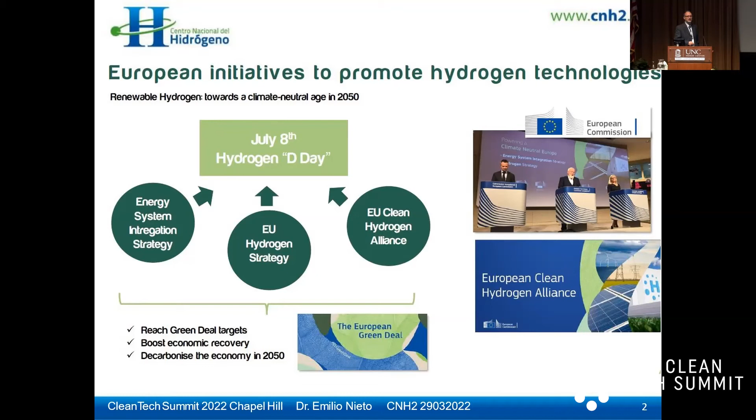We're not talking only about research projects, but also about how to help with investment, how to help with regulation, which is a critical point, and also how to boost the market situation and improve the possibilities for people—not only companies, but also people working in universities and research centers—working together to comply with the goals already defined.

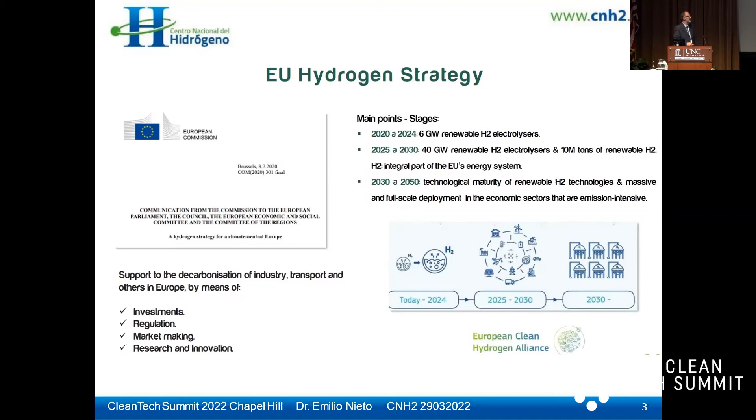And this is the brief discussion: the Commission wants to have close to 25% of hydrogen covering the demand for energy. They have a huge amount of money to put in, and we will see, because of the problem with the Russian war, the Commission is starting to think how to boost and speed up this process, and maybe the final decision next year is to put a bit more money and give more chance to deploy the hydrogen economy more quickly.

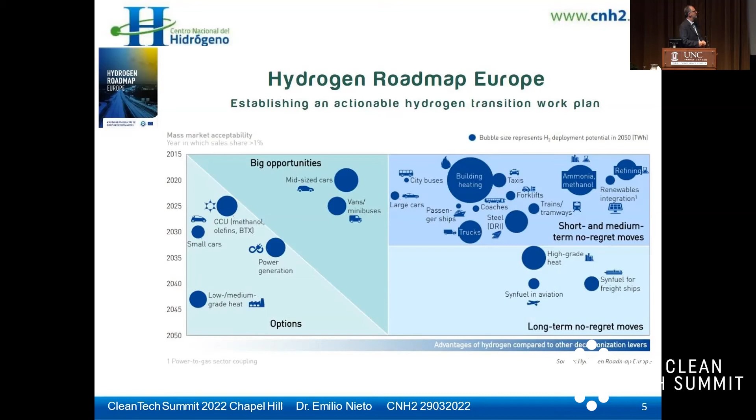You can see more or less the NOx reduction, CO2 reduction, and a lot of different jobs to be created. This diagram shows that the proposition is to play across all the goals—not only heavy duty, not only range, not only trucks, but also a lot of different possibilities. You can see here they are proposing different possibilities to boost short, medium, and long-term opportunities for creating and deploying all these things.

We have a lot of different possibilities for renewables, and a lot of different industries already consuming a large amount of tons of hydrogen today. This is a huge potential to profit and collaborate all together, and try to produce not only hydrogen for our own consumption in Spain, but also a lot of different hydrogen in order to sell outside Europe.

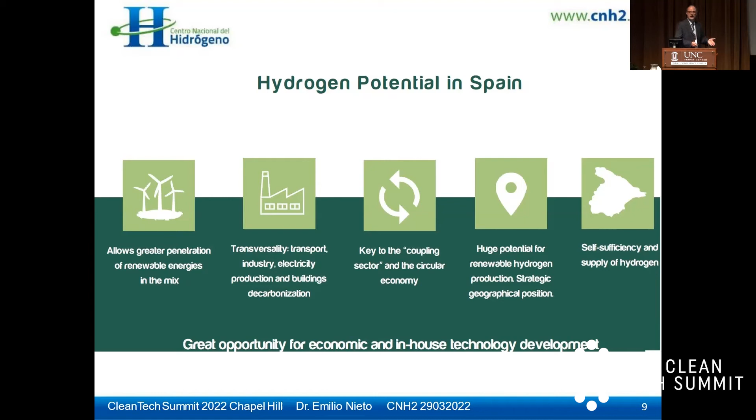There are a lot of different sustainable goals, and all this hydrogen momentum we are having in Spain, they concentrate on covering all the whole goals. You can see Action 9 and Action 17 based on research and development, and also how it's possible to boost renewable energy. That is the base of the strategy here in Spain in order to continue moving forward.

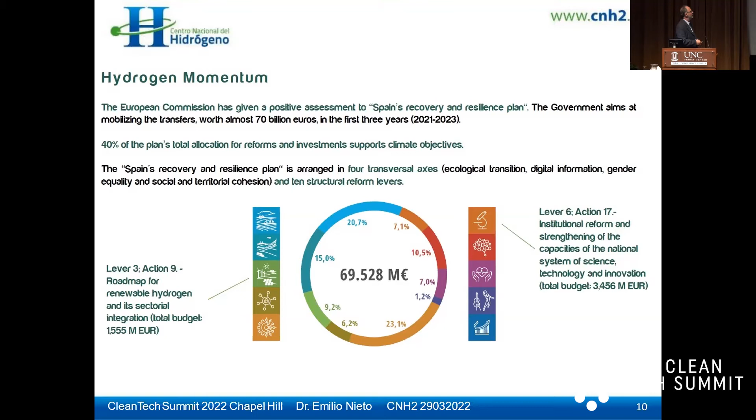But the hydrogen strategy in Spain, where is it concentrated? They are concentrating on green hydrogen, renewable hydrogen, using this renewable hydrogen as an energy vector. At the final part of the presentation, I will try to give you a lot of different examples about the different hubs and huge projects they are proposing.

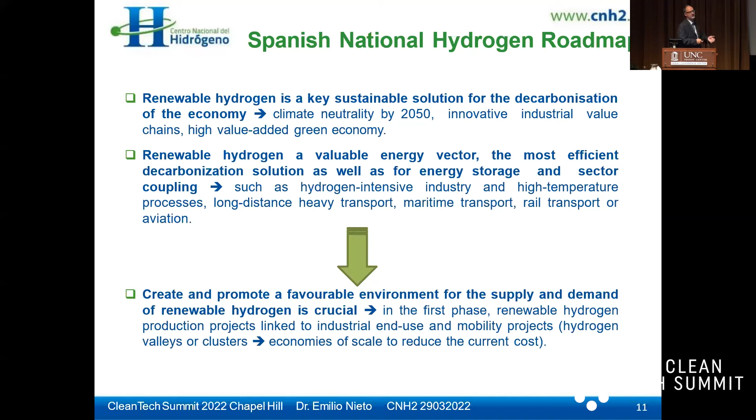But the main goal is to try to organize all together, to work in order to not lose opportunities, making isolated projects or proposals, and try to put it all together in order to present a real hub. It's not only about concentrating the production of hydrogen, but also trying to increase the demand and the off-takers of this hydrogen.

They are covering all the different applications of hydrogen. They are not concentrated only on applications that use hydrogen as a raw material in industry, but also on using the different possibilities that hydrogen offers where electrification is technically not feasible or very costly.

They are also covering the solutions hydrogen can offer on an island, in an isolated area, where you can disconnect completely from the network and continue working together in order to move forward.

And also the standards - this is quite a critical issue, not only in Spain but in all countries, in order to work all together to define a common rule and continue to create a standard and a regulation specifically for hydrogen.

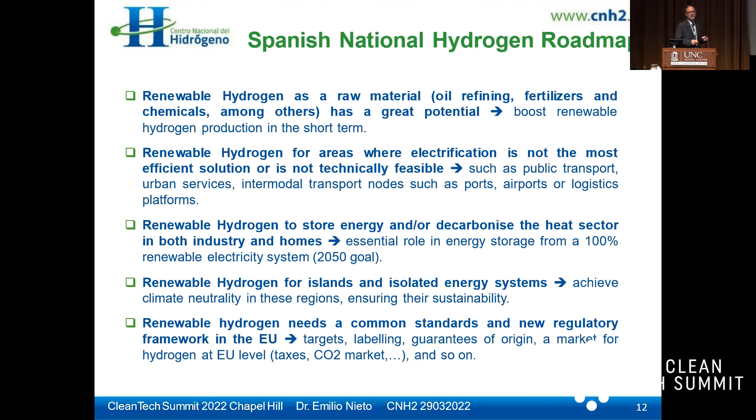There are 60 measures. These 60 measures are divided across different years. In the next slide, I will try to show you. The main goal is to try to present the whole value chain of hydrogen.

And the wide participation - I mean, this strategy was not published by one ministry, but by 4 ministries collaborating. For me, this is the first example in Spain of doing that. Most of the time they are isolated and not working together, and this is quite a good example that if you collaborate, it should be quite good in order to move forward.

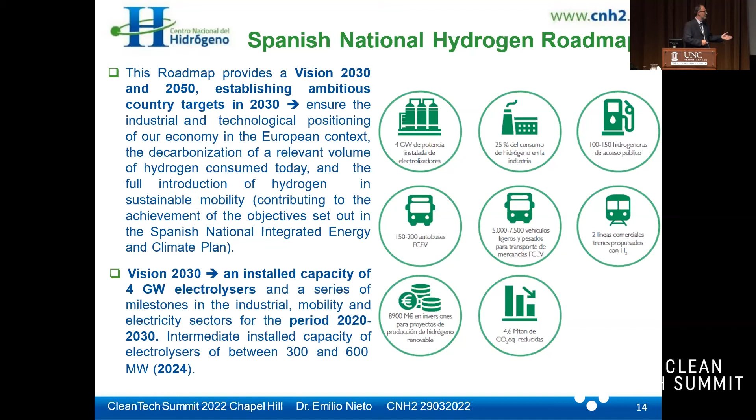We have this PERTE. The PERTE is the project for renewable energy, renewable hydrogen and storage. And this is the way that the ministry will spend the money.

You have to apply with this kind of funding possibilities, concentrate in these three main businesses, and the goal is to build on the strength we have in Spain regarding renewables capability, industry, and the technology and manufacturing we need to develop all together.

If we are tracking and checking individually, what's happening with the technology? We have a lot of different capabilities, but the problem is we don't have any company working on fuel cells or producing electrolyzers. So the main part of the money should go toward creating that situation in Spain, not buying the stacks outside Spain, but trying to make a Spanish stack and integrate it all together.

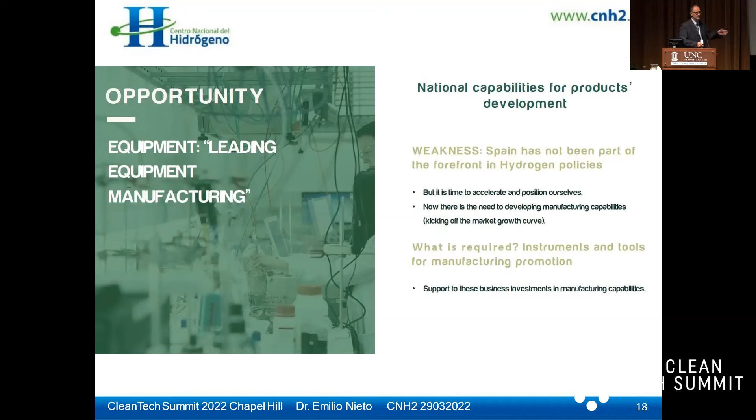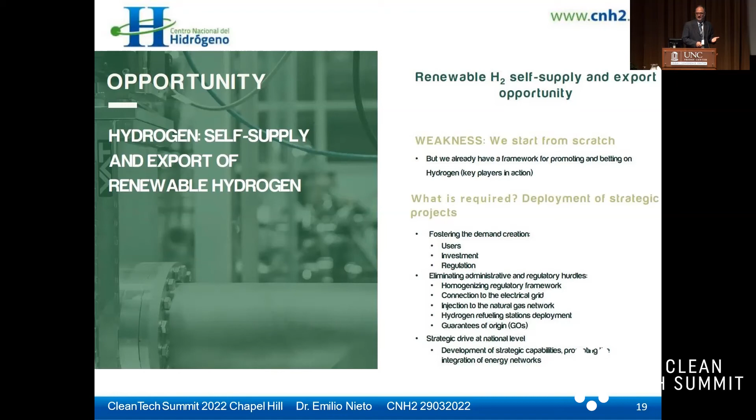Talking about manufacturing, the same applies. We have a lot of different capabilities and companies in Spain with a lot of experience in manufacturing, but they have no experience at all in the hydrogen business. So this kind of money needs to push those companies to apply and move forward, and also toward self-sufficiency. We've discussed over the last two days in different sessions how it's possible for us to start moving, but you can see we are starting from zero. This is the problem in order to move forward.

We have a lot of different bodies. The main body is the Spanish Association of Hydrogen, and we are now working on an industrial sectorial agenda, in Spanish. This is the first time the needs of the industry are considered, and how it's possible to cover those needs with different research projects and try to give a solution. This is a preliminary result, we are in the middle of the analysis.

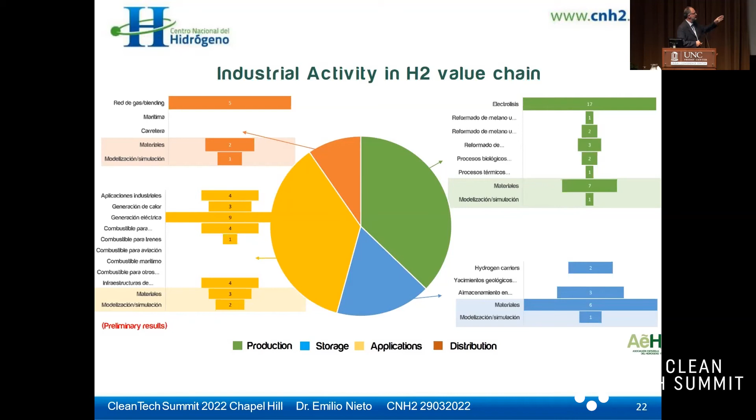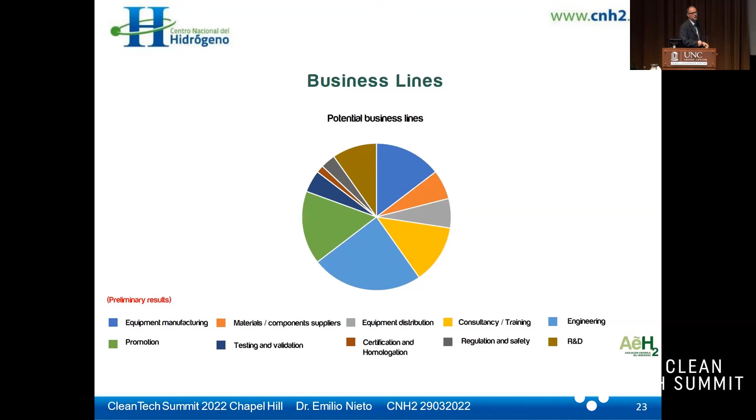If we look at the industry activity in Spain across the hydrogen value chain, most of it is concentrated in production and applications, with some part in storage and very little in distribution. Looking at business lines, we cover more or less all parts of the value chain, with a huge part being equipment manufacturing, also project promotion, and some part from research and development, as shown at the beginning of the presentation. These are the main distribution areas, the main possibilities for growth.

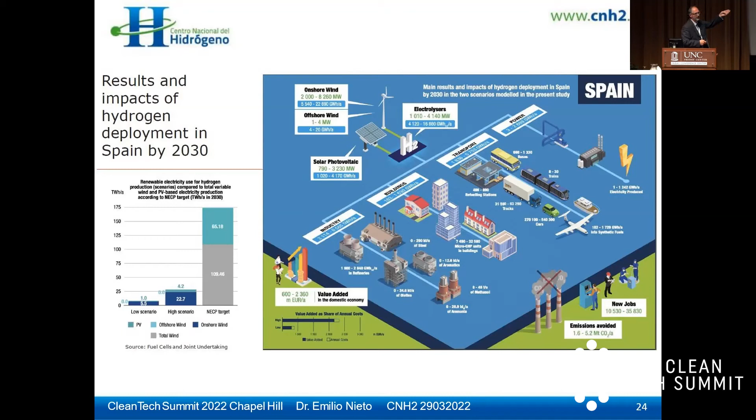This is the picture: having this value chain, having these hubs or clusters of hydrogen, with a lot of different companies working together to integrate renewables, whatever form that takes. In Spain we have a lot of photovoltaic, not too much wind, but we are pushing to increase wind capacity in order to feed the electrolyzer. Once the industry produces the hydrogen, it can cover different industrial lines, buildings, and also be used for energy production.

Some words about our center, the National Hydrogen Center. The National Hydrogen Center started in 2007, so this year we will have 15 years. For me it's a success, because we started from scratch with no experience at all in hydrogen. When we started in 2007, people looked at us like we were coming from the moon, because we were talking about hydrogen and nobody knew anything about it.

It took 2 or 3 different opportunities, and now it seems that this is the time of hydrogen. These 15 years of working to increase our knowledge and capabilities allow us now to start giving added value and collaborate with different industries on all the different projects we will show you later.

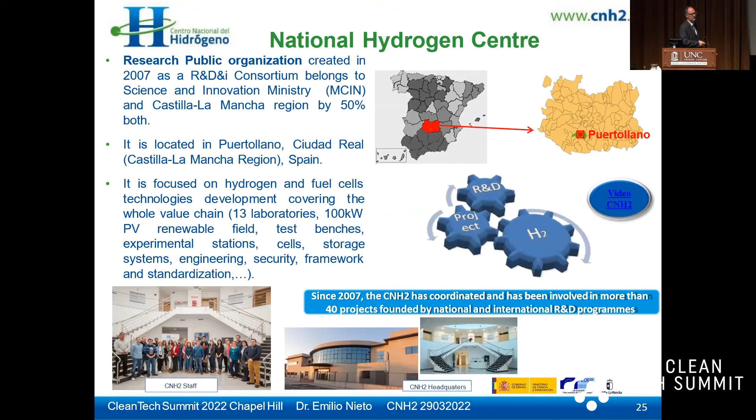We have 13 labs, and we cover the whole value chain. This means we have different labs for production of hydrogen, of course concentrated on green hydrogen, but we also have different processes including biohydrogen and photoelectrocatalysis, which is a new process being tested by different companies in Spain.

Once we have the hydrogen, we have different labs working on how to store it. We are working with different approaches, but the main process is storing it as a gas under pressure.

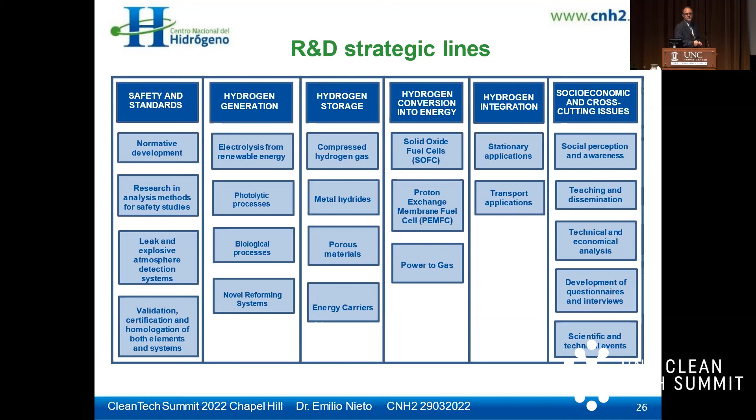We have different plans to continue working with different systems to store the hydrogen, and how to develop the different conversion using the fuel cell, not only for low and medium temperature, but also high temperature with solid oxide fuel cells. Then to apply it in different applications, not only for mobility, who pay more per kilo of hydrogen, but also for stationary applications. Two important corners are security and safety, and also the cross-cutting issues. As an administration body, we have to inform society in order to move forward.

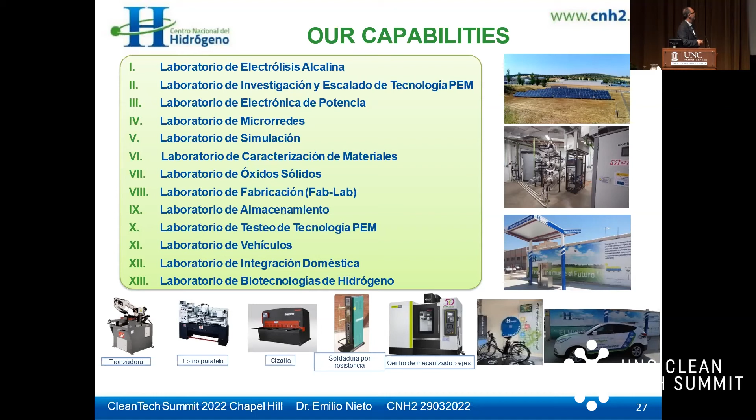Now we are building the second one with two different pressures and portable, so it's possible to use this in a truck to move around and make the validation, whatever the project is. We also have different laboratories and mechanisms to make different pieces or parts of the value chain, giving us very good information about that.

Some projects: in the last 3 years we had 2 regional projects. One was concentrated on using biomass and waste - in that area in Spain, waste from the forest and from agriculture. We process different mechanical treatments in order to increase efficiency and achieve syngas.

Another regional project was concentrated simultaneously on how it's possible to improve the solid oxide fuel cell. Now we are working on integrating both systems and making a pilot plant in order to use this to produce heat, cooling, and electricity.

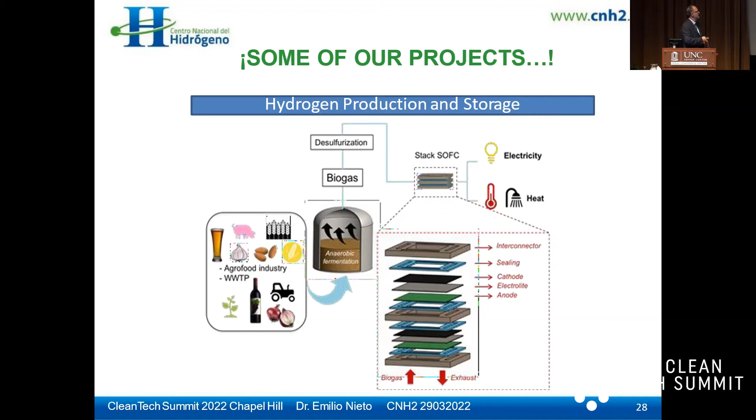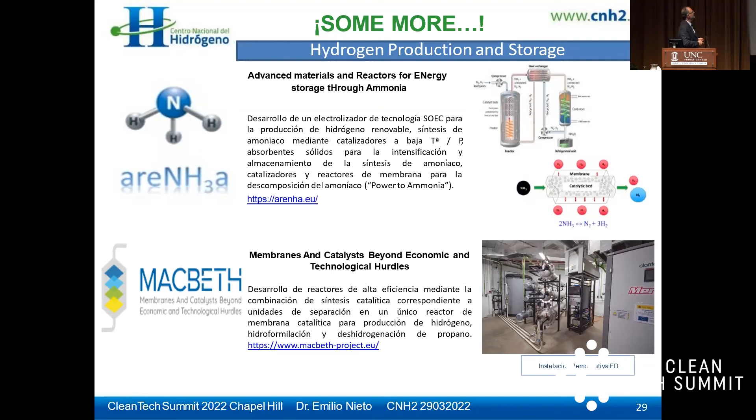Another project, a European project we're working on, is with ammonia. One of them, MACBETH, is about how it's possible to improve the catalyzer. This catalyzer will be applied in the ARENHA project, where the whole process will be integrated, and you will be producing green ammonia, with the possibility to test the green ammonia's behavior against all the different possibilities for storing hydrogen.

One important project from the Commission is H2Ports. H2Ports is the use of hydrogen not as a fuel for ships, but as a decarbonized solution for the logistics of the port. We are working here to create a reach stacker and a yard tractor that use hydrogen for moving. You can see the blue area - this is the Valencia port on the Mediterranean coast of Spain.

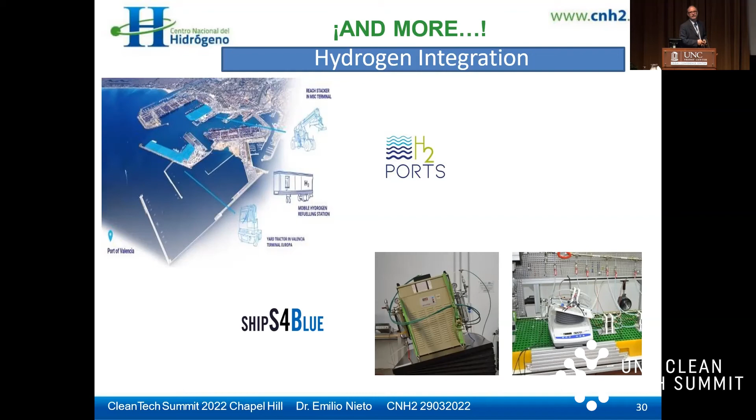In the smaller green area, we are producing the hydrogen, and we have one truck with the final storage and different tools for feeding. These move to the other big area where there are different vehicles for the loading and unloading of containers within the port.

We have another project - we are creating a car. This car should compete next year in Sweden. This is a competition with different categories, and it will compete in the hydrogen category, and we will see what happens.

We have another project together, about how to use hydrogen in a domestic area to have a micro CHP working in the house, and also to use the surplus energy you are producing to produce a small amount of hydrogen. This small amount of hydrogen goes to a small hydrogen refueling station, maximum 1 kilo of hydrogen. You use this 1 kilo for your daily transportation to save money, because most people, when driving every day, don't drive too many kilometers. So with this 1 kilo of hydrogen, it's enough for you to move and come back, and it's not costly.

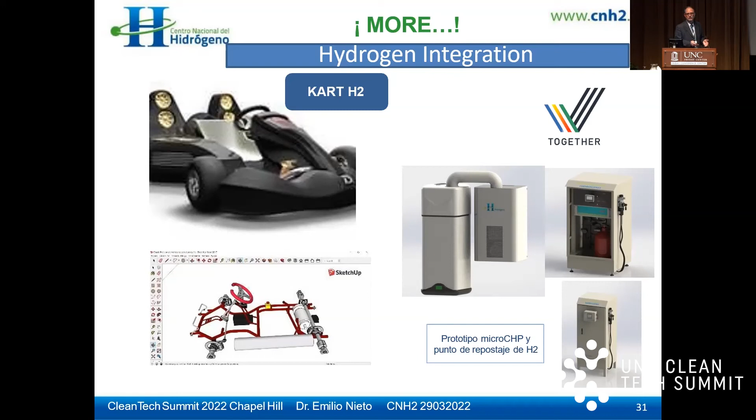And of course, when you want to travel on weekends, you need to go to a hydrogen refueling station, not in Spain because we don't have it yet, but in the near future it will be possible. I will show you a free application you can download from Google Play called Hydro Travel, so you can have on your mobile how your travel will be if hydrogen is used as a fuel cell.

This was developed there in the Institute, and the idea is to integrate all the maps in the future in Spain in order to have all the hydrogen refueling stations available at that time.

The other two projects: one is mining electromobility, an international project collaborating with Chile. You know that when you want to open an underground mine, ventilation is 80% of the CapEx. By using hydrogen in these vehicles, you can reduce close to 90% of this investment, because you don't need such huge ventilation equipment, since only vapor is exhausted from these vehicles. This should be very good for keeping the underground mining environment clean.

Another important project uses smart grids. This is the Interreg Sudoe, a project from the southwest of Europe covering France, Spain, and Portugal. We are creating a smart grid with different sources of energy integrated into the same system, applied to a building with 24 hours, 7 days a week energy needs, trying to achieve a zero emissions goal.

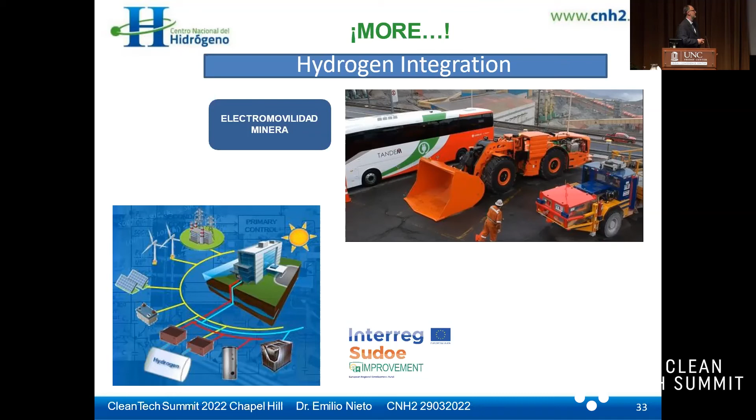This is a very important project. We will have two demonstrations: one at the end of this year in a hospital in the Mediterranean area, and the other at a data center in a university in Lisbon. With these two, it's possible to show that you can disconnect from the network, start working, and not suffer a lack of resources.

And of course there are more projects about how it's possible to inform what hydrogen is, and which kinds of things with hydrogen are possible to move forward.

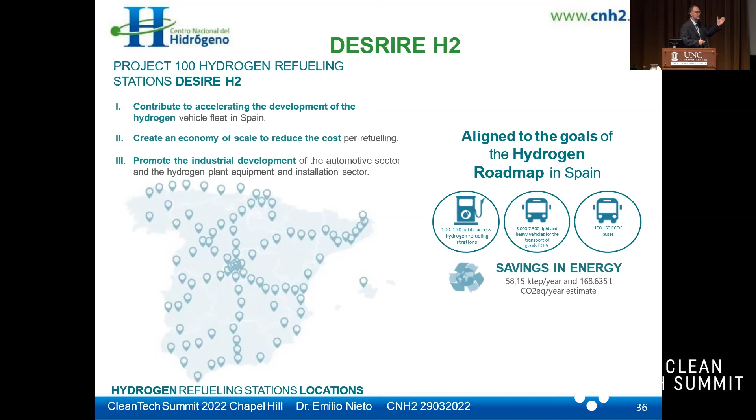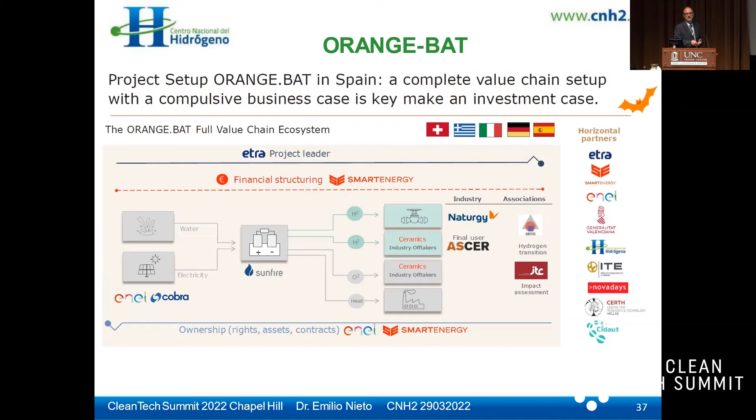Another one is Orange Bat. This is an IPCEI project, an important project in Europe, covering the whole value chain and focused on the ceramic industry. This is one of the applications, like steel or construction, but ceramics is also a high consumer of gas and energy, producing a lot of CO2 emissions.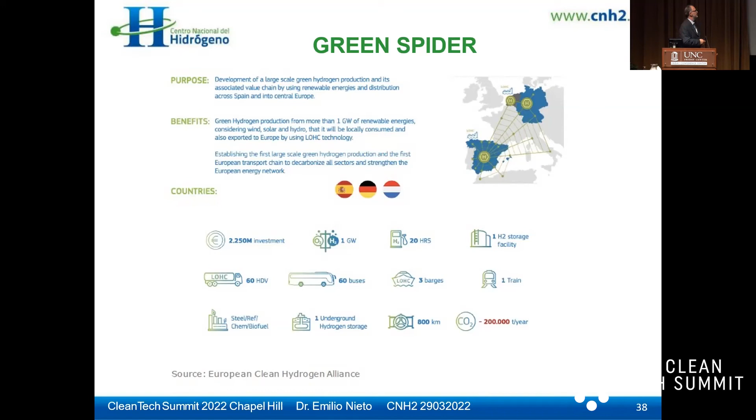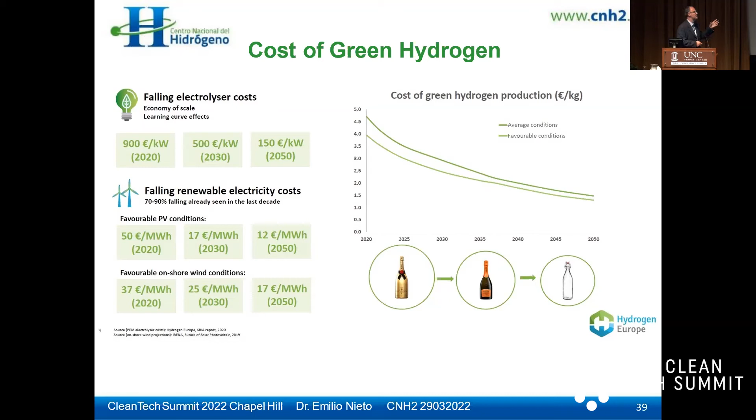The cost of hydrogen - these are the last figures from the Hydrogen Europe publication. The main goal is to reduce costs as quickly as possible and try not to be a luxury product, but to be a commodity. Of course, this isn't always easy, and we need to work on producing this hydrogen. It's not just a question of producing a lot of different hydrogen, but I have to spend a lot of money to store that production. I need to force the off-takers and force the demand. If demand is also available, the cost will be reduced more quickly.

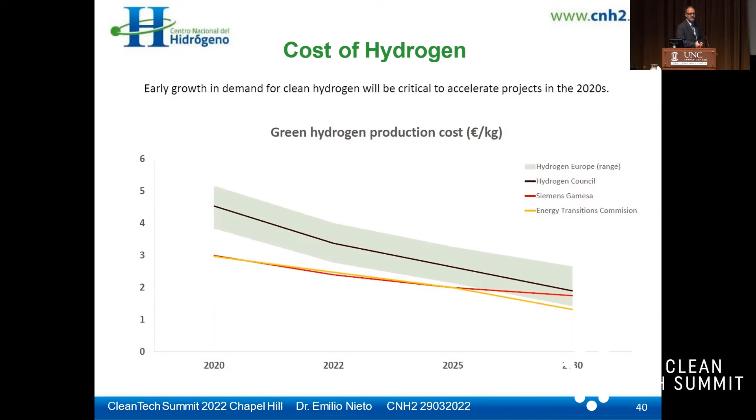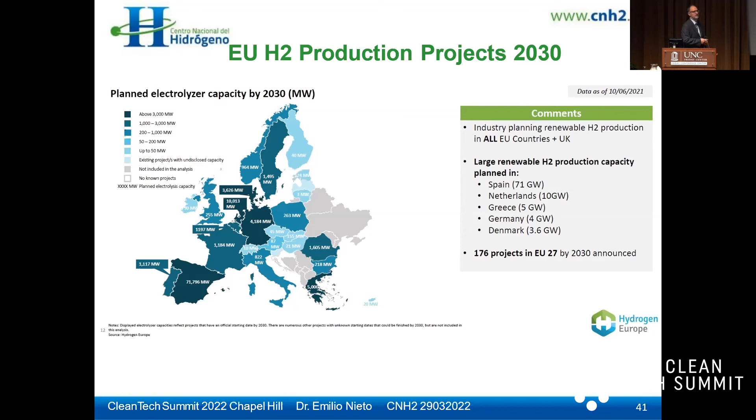The Commission was sharing this kind of information - there were more than 170 projects proposed. It will also try to cope with these solutions to give a possibility to remove the barriers, try to reduce the cost mainly, and create all the facilities and ground to propose this kind of projects in a harmonized way. I tried also to show the transition from gray to green hydrogen, which is the main goal in order to reduce CO2 emissions at the end.

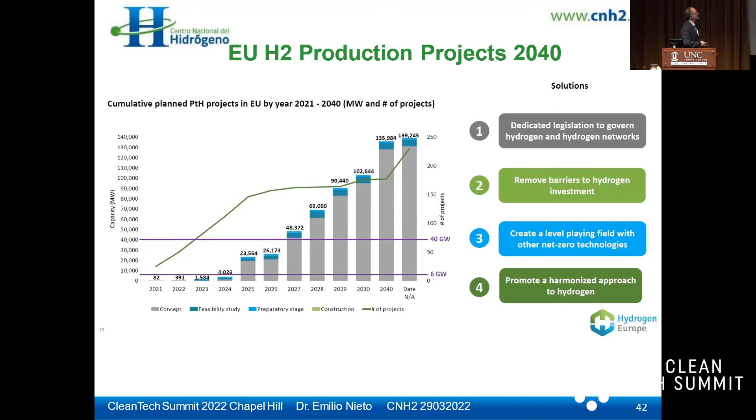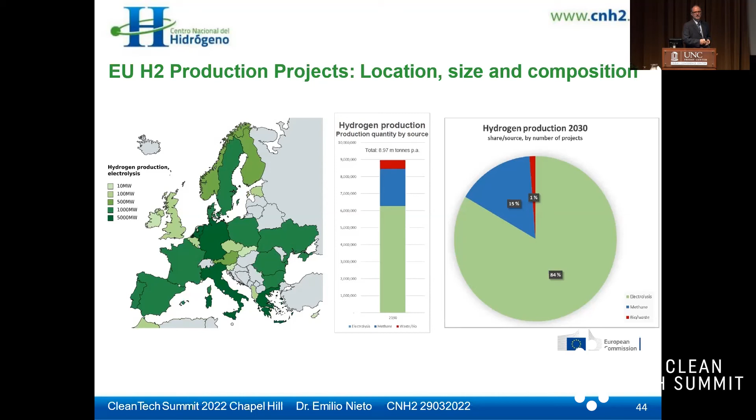If we talk about the production process, most of them are electrolysis, and some part is also methanation. Methanation uses the emission of CO2, blending it with syngas, treating the waste, and trying to make methane - green methane - in order to use as a fuel, or to integrate this kind of methane into the gas grid.

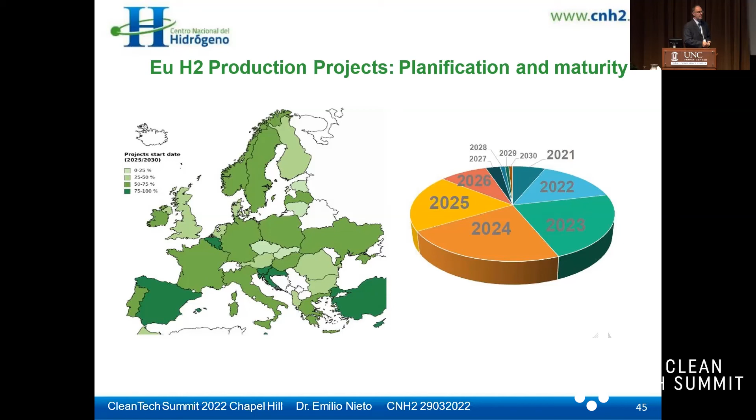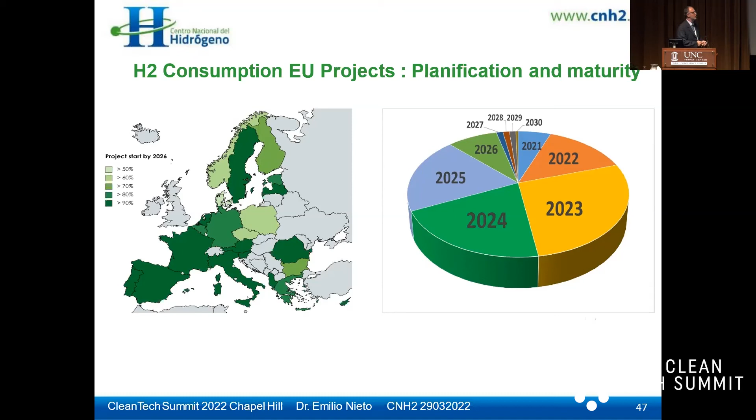The main goal you can see in the production is the same as in the consumption of the hydrogen projects proposed. It's more concentrated in 2024 and 2025 in order to have those projects already in work. If we try to make an analysis about the different applications for where this hydrogen will be used.

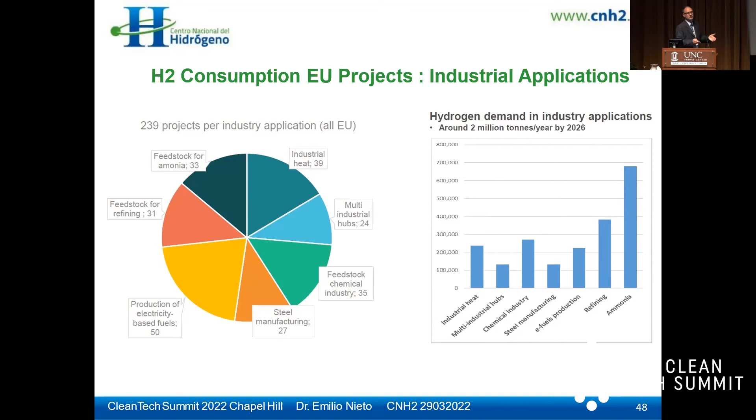It will be ammonia, refining, and the chemical industry as we are already using. We are not thinking about creating new applications. First, the main goal is to try to replace the gray hydrogen, and this amount in Spain we consume is about 500,000 tons of hydrogen. The main one is refinery, the second is fertilizers, and the third is a mixture of different industrial applications as raw material. The main goal is to try to replace this gray for green, instead of thinking how it's possible to create new applications for using this gray hydrogen.

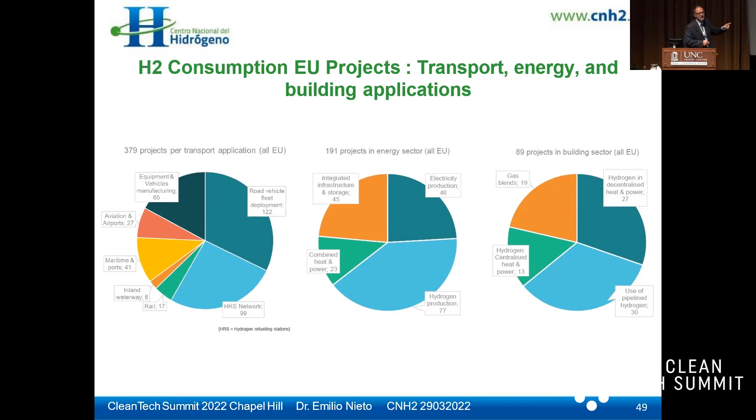In order to see how those projects will be presented, the amount of projects will cover the transport, energy, and building applications. You can see here the different transport applications - of course, the main part is to create a fleet. If we talk about energy, the main part is the production of hydrogen and also the production of electricity. And if we talk about building applications, you can see it's more or less equal across the 4 different distributions of applications.

This is the last one. I don't want us to be too far from the point - I would like to say that we are talking about hydrogen, but hydrogen is not the unique solution. At the end, we need a blending of technologies, a mix and hybridization of different technologies. Of course, hydrogen will be the best in some parts, but in other parts there will be different solutions, like batteries, for example.

This is only to show you that the people working on batteries continue working and trying to improve the different materials and efficiency, and of course they are working to reduce the cost in the future. So we will achieve 2050 with a lower cost.

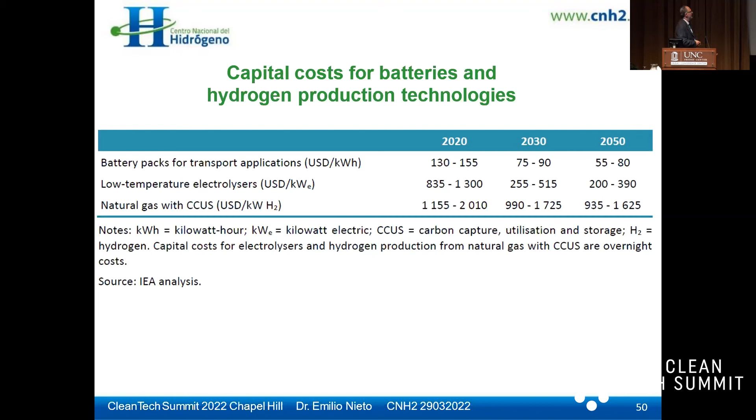And what is surprising to me is considering the blue hydrogen, considering CO2 trapping, in order to make this kind of transition also available to industry. This was already shared - the International Energy Agency made this report, and the main goals covered in this report are to work on hard-to-abate industrial applications, to work on transport whatever the final application is, try to use green hydrogen to boost energy, and work to inform society about the different advantages we have in complying with this kind of hydrogen economy.

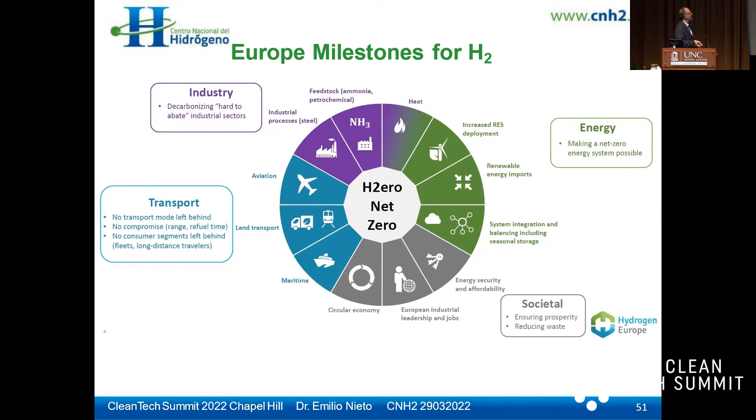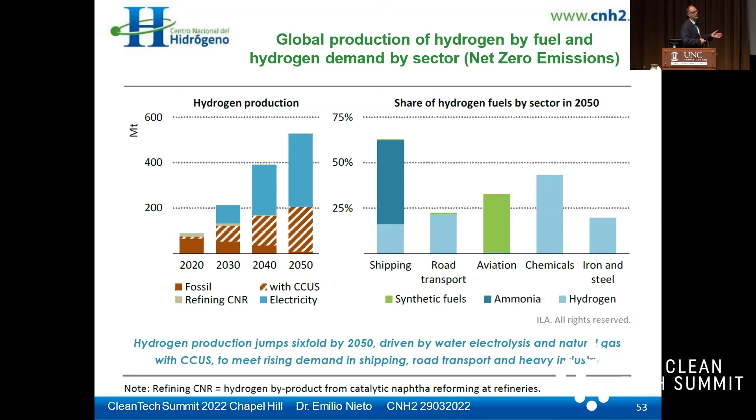And another important point is the one about considering the trapping of CO2. The CCUS technologies should also play a very important role in the coming years. At the end, in 2050, all of us want zero emissions, but it will be very complicated because in some of the data there will still be some carbonic fuels not completely exhausted and eliminated from the mix.

Another important issue is that liquids should be used for aviation and some part for shipping with ammonia instead of synthetic fuels. There are also bio-products that will be used, low carbon gases from the gas grid, and fuel cells will be mainly focused on transport, with some part in industry and very few in buildings.

We are comparing with, for instance, Asian countries like Japan and Korea. Japan and Korea have a lot of different developments in order to apply hydrogen into houses. I think it will not be so easy to bring to Europe, because most of the companies producing this kind of equipment are concentrated there. So it's logical to think that if I buy this equipment at a low rate, and this equipment travels to Germany or Spain, you have to pay a lot of money, and there isn't a good business case to perform these kinds of things.

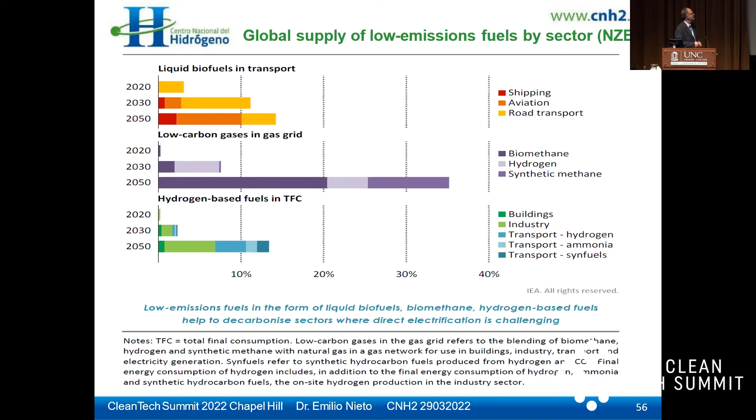And these are my data. If you have any question, I will be more than happy to answer. We have 6 minutes.

We have recommendations around best practices to prepare infrastructure to receive hydrogen. It's a good question, because I think all the different countries approach it in a different way. It depends on your infrastructure.

In Spain, we are focused on using the ports, because we are, let's say, like an island, because we have a lot of different coasts and a lot of different ports, and it's quite easy that the hydrogen, whatever it will be, ammonia or hydrogen or liquid hydrogen, it will be from North Africa, it will be from the north.

The question is how is best in order to perform a huge project, to start as soon as possible with economy of scale to reduce the cost. This is the route that, at least in our country, was starting to perform that, in order to make a huge amount of consortia and different industries to concentrate on the high production of hydrogen.

And once you are producing the hydrogen, you will apply it to different applications. Most of them are looking for a high percentage of use in mobility. Why? Because they are paying you more for the kilo of hydrogen. This is why they are trying for at least half of the hydrogen production to be applied to different transport applications. But there are many, I mean, you will see there.